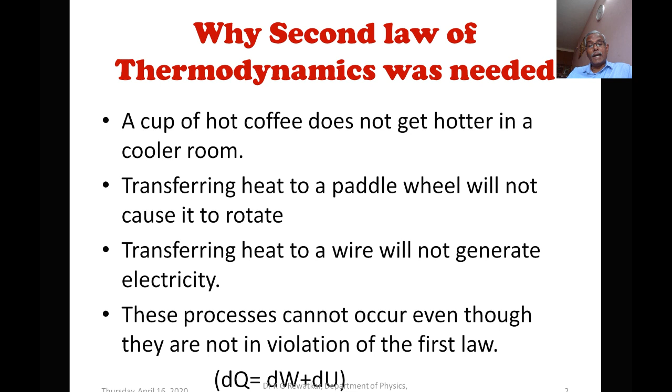The third example: transferring heat to a wire will not generate electricity. So these processes cannot occur even though they are not in violation of the first law. As per the first law, whatever energy is supplied to the system will be utilized in doing work, and the remaining or excess energy will be stored as internal energy.

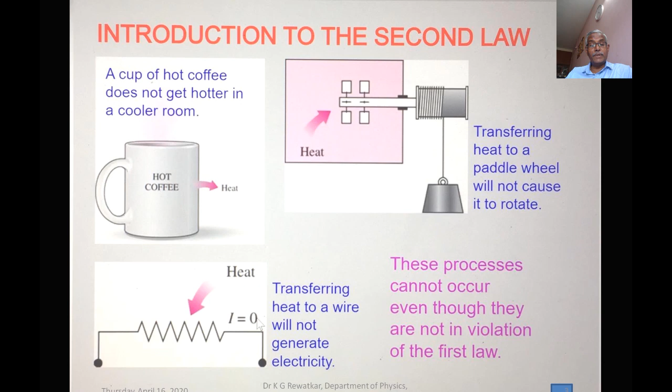But it is not complete, because it does not give a direction. So there is a necessity to think over this, and therefore the second law of thermodynamics comes in. The major use of the second law is that it may be used to identify the direction of the process. This is very important.

The second law also asserts that energy has quality as well as quantity. The first law is concerned with the quantity of energy and the transformation of energy from one form to another with no regard to its quality. So the second law provides the necessary means to determine the quality as well as the degree of degradation of energy during the process.

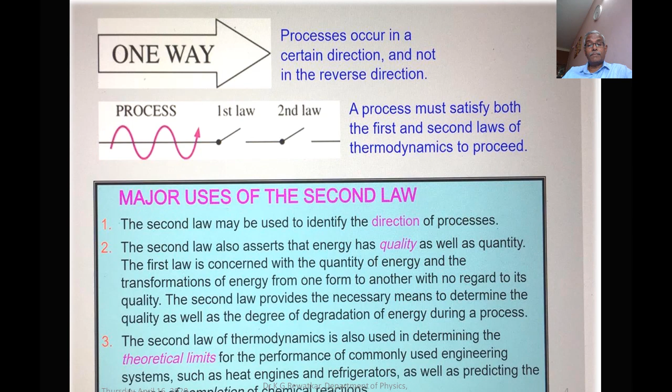Thus we can say that the second law of thermodynamics is also used in determining the theoretical limits to the performance of commonly used engineering systems such as heat engines, refrigerators, etc., and of chemical reactions.

Let me explain the concept of the thermal energy reservoir. Bodies with relatively large thermal masses can be modeled as thermal energy reservoirs. In nature we can see the atmosphere, rivers, lakes, oceans. These we can consider as sources of thermal energy through which energy can be given back to the earth.

A hypothetical body with a relatively large thermal energy capacity that can supply or absorb finite amounts of heat without undergoing any change in temperature is called a thermal reservoir. In practice, such large bodies like oceans, lakes, rivers, as well as atmospheric air can be modeled accurately as thermal energy reservoirs.

Now let us consider an example of a steam power plant. In a steam power plant, heat is supplied to the steam in a boiler from a high temperature source like a furnace, and a pump is required to supply water to the boiler. Similarly, heat is rejected from the steam in a condenser to a low temperature sink, such as the atmosphere or a river.

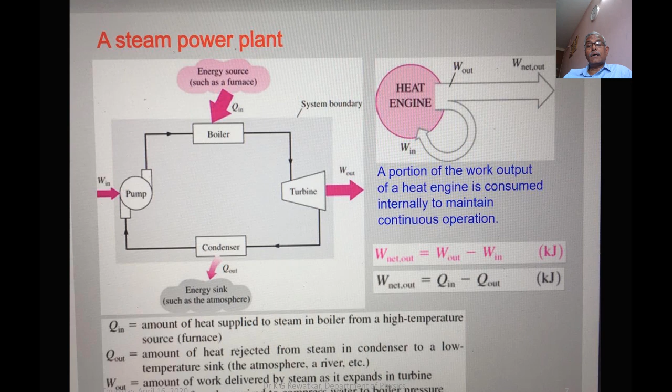Now W out means the output work that will be obtained by supplying the steam to the turbine, and W in means the amount of heat in the form of steam supplied. So this shows that a portion of the work output of a heat engine is consumed internally to maintain continuous operation. So from this we can calculate the efficiency of any heat engine. So here from the

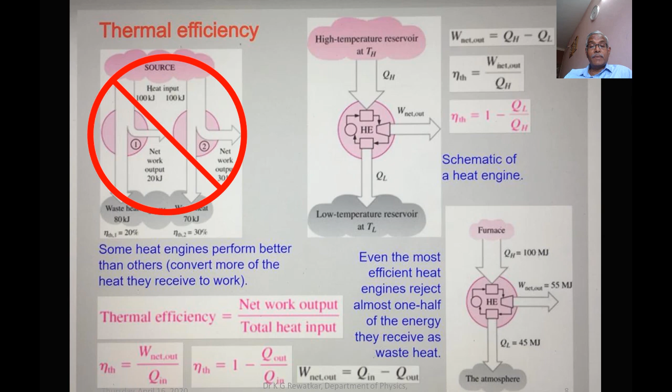So we have understood from this that the second law of thermodynamics not only gives the amount of heat that will be utilized or taken out from the body, but also gives the direction in which it goes. Therefore, two statements are very famous for the second law of thermodynamics. The number one statement is the Clausius statement.

What does it say? That it is impossible to construct a device that operates in a cycle and produces no effect other than the transfer of heat from a lower temperature body to a higher temperature body. Or in other words, a refrigerator cannot operate unless its compressor is driven by an external power source such as an electric motor.

What does it mean? That we cannot develop a machine which can take heat from the colder space or colder body and deliver the heat to the hotter body. If we want to do this, taking heat from a colder body and delivering it to a hotter body, then we require some external source, external agency, external device, external power to drive that, because this is against the natural law.

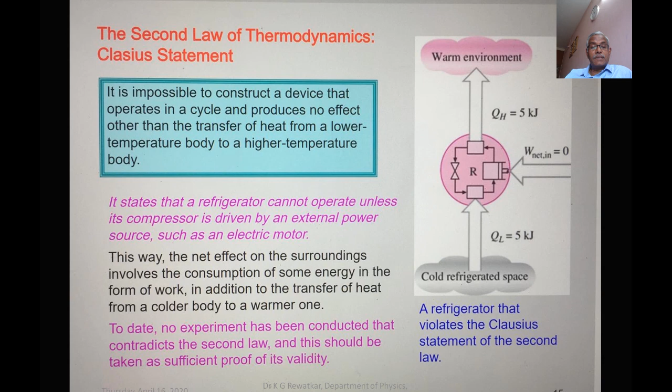To date, no experiment has been conducted that contradicts the second law, and this should be taken as sufficient proof for it. Now let us take an example of refrigerators and heat pumps. In the household refrigerator, that is a domestic refrigerator, the freezer compartment where heat is absorbed by the refrigerant serves as the evaporator, and the coil usually behind the refrigerator, where the heat is dissipated to the kitchen air, serves as a condenser.

If we see the basic components of a refrigeration system, then typically we have an evaporator, a condenser, and a compressor on the back side, so that we can compress, and the heat will be generated, so that heat will be taken out with the help of the compressor.

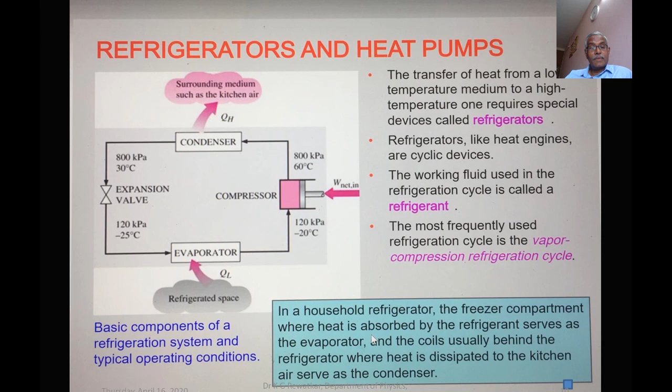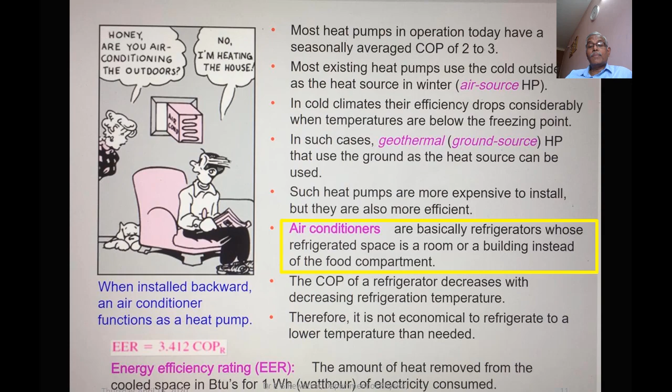So in thermodynamics, there are two kinds of process which are very important to understand the principles and working of the various laws of thermodynamics. The number one process is a reversible process, and number two process is an irreversible process. Let me explain what a reversible process is.

A process that can be reversed without leaving any trace on the surrounding. That means the path it follows in a forward direction, the same path will be followed in the reverse direction, so that the net heat is the same as that of the initial. So the initial condition is maintained in the reversible process.

An irreversible process is not reversible. So when the body starts from one position, goes to some other position, then it will come back following some other path. Even in that case, it is losing some of the energy to the surroundings. All the processes occurring in nature are irreversible. Yes, all natural processes are irreversible processes.

Why are we interested in reversible processes? Because they are easy to analyze. They serve as an idealized model to which actual processes can be compared. And some processes are more irreversible than others. We try to approximate reversible processes.

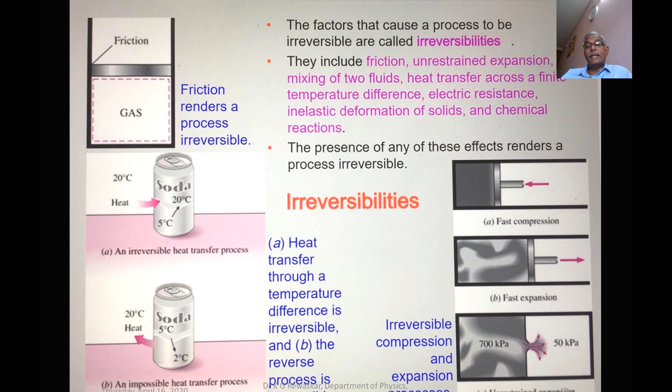Reversible processes are of two types: internally reversible process, if no irreversibilities occur within the boundaries of the system during the process, and externally reversible process, if no irreversibilities occur outside the system boundary. So a totally reversible process involves no irreversibility within the system or its surroundings.

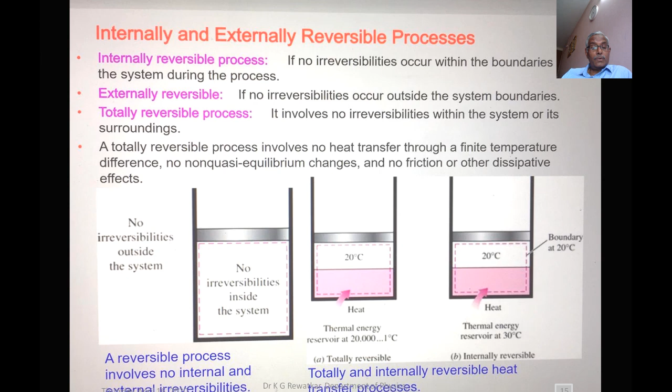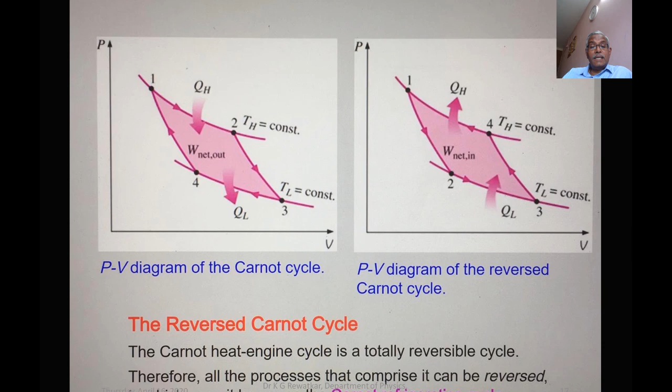So the Carnot heat engine cycle is a totally reversible cycle. Therefore all the processes that comprise it can be reversed, in which case it becomes the Carnot refrigeration cycle. Now we can explain the Carnot principle, the Carnot first principle.

What does it say? Suppose we have two engines, one irreversible and one reversible. The irreversible engine will be taking heat. Irreversible means it is against the reversible process, a process in which there is some loss from the system to the surroundings.

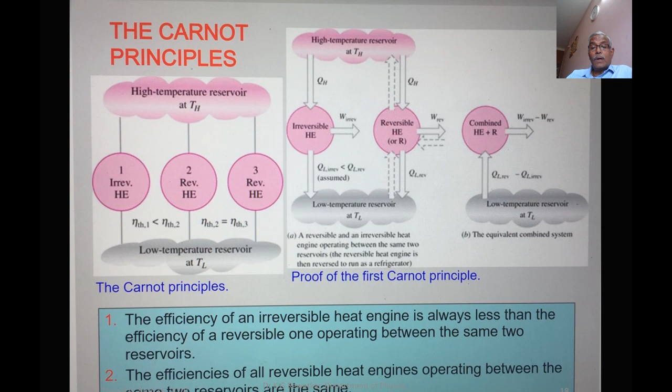Then in that case, if you see the efficiency, the efficiency of a reversible engine will be more. So this also says that the efficiency of an irreversible heat engine is always less than the efficiency of a reversible one operating between the same two reservoirs. The efficiency of all reversible heat engines operating between the same two reservoirs are the same.

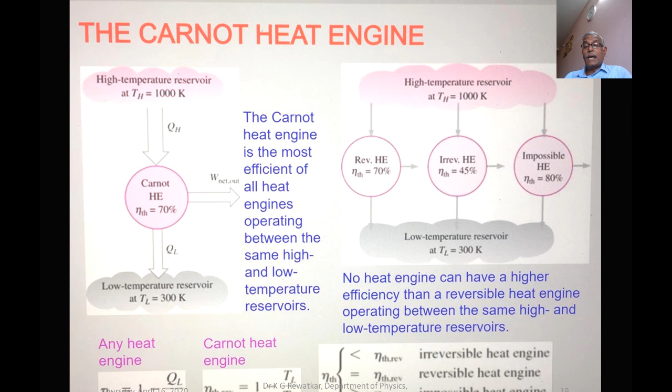So therefore, if you calculate it by putting in the formula, eta is equal to 1 minus QL upon QH, we can find out the efficiency. Then for this, TH high temperature is 1000 and low temperature is 300 Kelvin, and we calculate the efficiency. So therefore it proves that no heat engine can have a higher efficiency than a reversible heat engine operating between the same high and low temperature reservoirs.

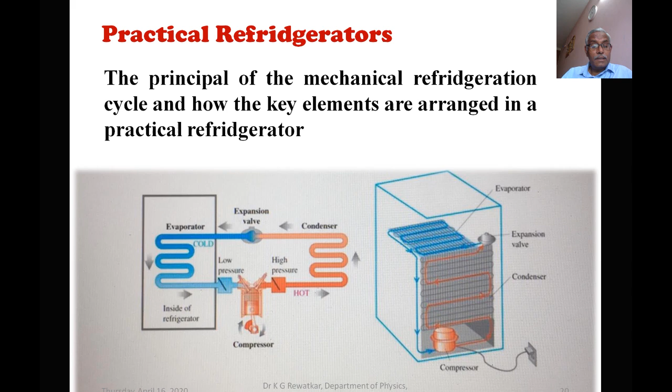So here we can see a practical example of a refrigerator, a domestic refrigerator or any kind of refrigerator. If you see in the second diagram, there is a coil on the back side of the refrigerator. What is this? This is a condenser, and there is a compartment which is called a compressor. So what does the compressor do? If you see the first diagram, it will absorb the heat from inside the fridge, it will be expanded and compressed, and then the heat or energy will be given back to the surroundings.

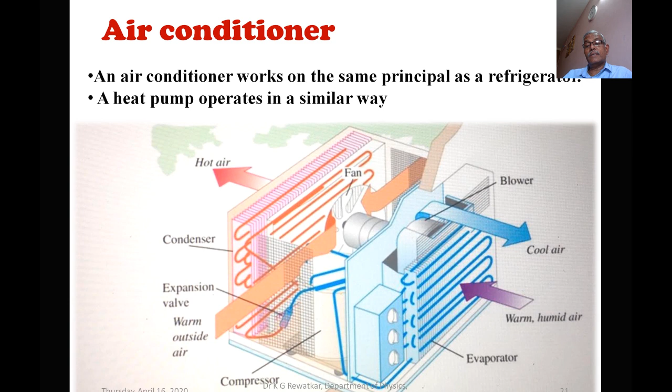The same example we can explain with the help of the air conditioner. An air conditioner works on the same principle as a refrigerator. The heat pump operates in a similar way. The right hand side of the diagram is inside the room. There are buttons, and outside you can see the hot air that will be given out to the surroundings. So there is a condenser, and then the expansion valve, and warm heat will be given out, so that the room will be cooled down. The warm and humid air will be absorbed by the air conditioner, and it will be compressed. Then the cool air will be supplied.

Now the third concept we can see is about the thermodynamic temperature scale, how the temperature scale can be maintained. A temperature scale is independent of the properties of a substance that are used to measure temperature. Second Carnot principle: all reversible engines have the same thermal efficiency when operating between the same two reservoirs, that means high temperature and low temperature. If we have a high temperature source and low temperature sink, and we place reversible engines in between, then they have the same efficiency.

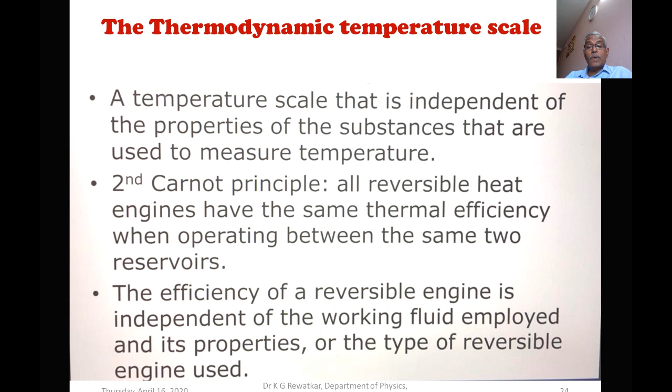The efficiency of a reversible engine is independent of the working fluid employed and its properties or the type of reversible engine. So the temperature scale is independent of the properties of the substance used to measure the temperature. Let us take the efficiency; it is a function of temperature, high temperature and low temperature. Since efficiency is calculated by the formula 1 minus QL upon QH, QH upon QL is a function of temperature.

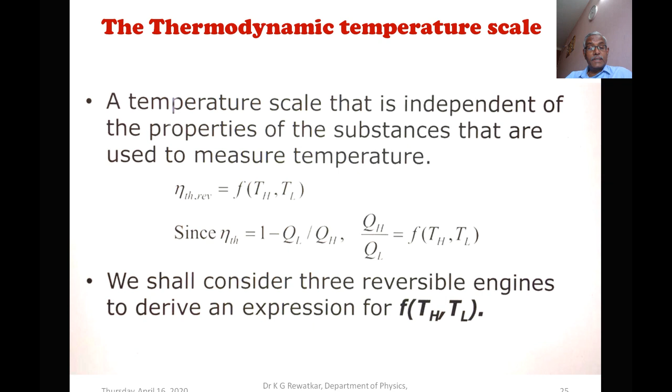So we shall consider three reversible engines to derive an expression for the function of temperature. Here we have a high temperature source which is maintained at a temperature T1, and a low temperature sink which is maintained at a temperature T3. In between we have applied the three reversible engines, heat engine A, heat engine B.

Now A will be taking heat Q1 and rejecting heat Q2 to the second engine B, and the second engine is taking heat Q2 from engine A and rejecting Q3 heat to the low temperature sink. In between, Q2 will be maintained at a temperature T2, and there is a third engine, engine C, which is operating between the temperature T1 and rejecting the heat Q3. So net work done by heat engine A will be equal to WA, B will be equal to WB, and C will be equal to WC.

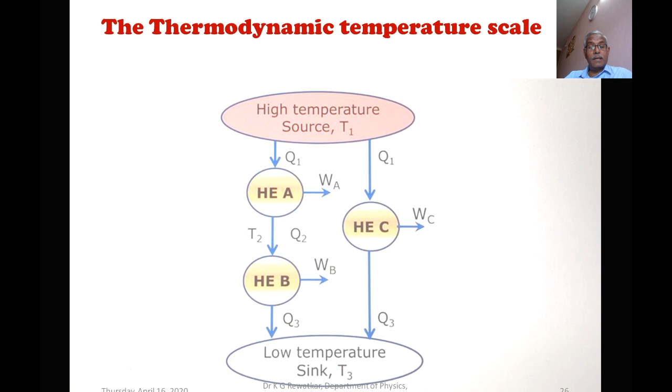So therefore we can say that from the heat engines A, B and C, Q1 upon Q2 is a function of temperature T1 and T2, because of how heat engine A is maintained. Heat engine B is maintained between Q2 and Q3, so it is a function of T2 and T3. And the third engine C is maintained between Q1 and Q3, so it is a function of T1 and T3. Since Q1 upon Q3 is equal to Q1 upon Q2 into Q2 upon Q3, therefore the function of T1 and T3, for heat engine C, will be equal to the function of T1 and T2, for heat engine A, into the function of heat engine B, that is the function of T2 and T3.

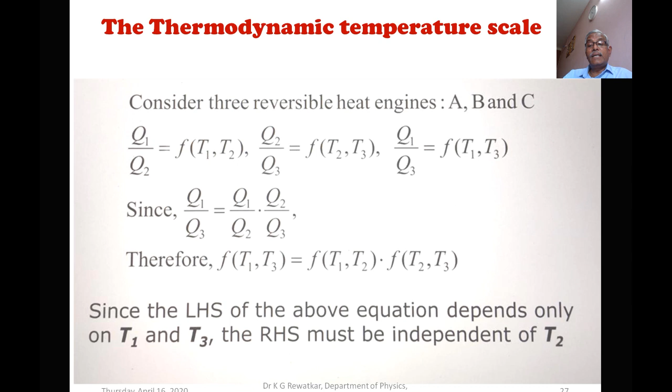Since the left hand side of the above equation depends only on temperatures T1 and T3, the right hand side must be independent of the temperature T2. So for this to be true, the function of T1 and T2 should be equal to phi T1 upon phi T2, and f of T2, T3 is equal to phi T2 upon phi T3. Hence Q1 upon Q3 is equal to phi T1 upon phi T3. In general, for a reversible engine, QH upon QL is equal to function of TH upon TL.

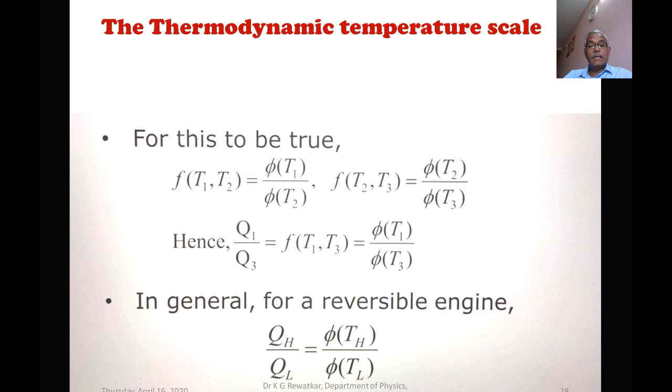So as per Lord Kelvin's proposal, that function of temperature should be equal to T, to define a thermodynamic scale, as QH upon QL for a reversible engine is equal to TH upon TL. This is called the Kelvin scale, and the temperatures on the scale are called absolute temperatures. So for a reversible cycle, the heat transfer ratio can be replaced by the absolute temperature.

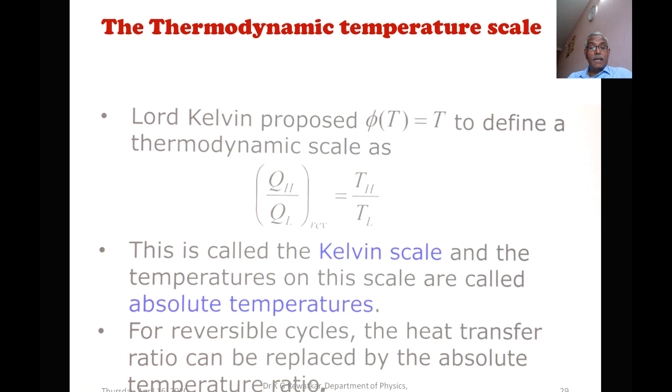So on the Kelvin scale, the triple point of water was assigned a value, as we all know, 273.16 Kelvin. So therefore the magnitude of a Kelvin is defined as 1 upon 273.16 of the interval between absolute zero and the triple point of water. Since reversible engines are not practical, other methods like the constant volume ideal gas thermometer are used for defining the scale.

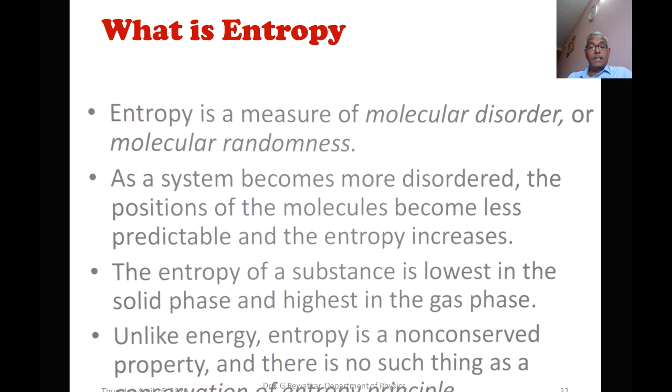Then what is entropy? Entropy is a measure of molecular disorder or molecular randomness. As a system becomes more disordered, the positions of the molecules become less predictable and the entropy increases. So unlike energy, entropy is a non-conserved property and there is no such thing as conservation of entropy. Let me explain entropy with the help of a simple example we come across, the firecracker. Entropy provides a quantitative measure of disorder. The explosion of the firecracker increases its disorder and entropy.

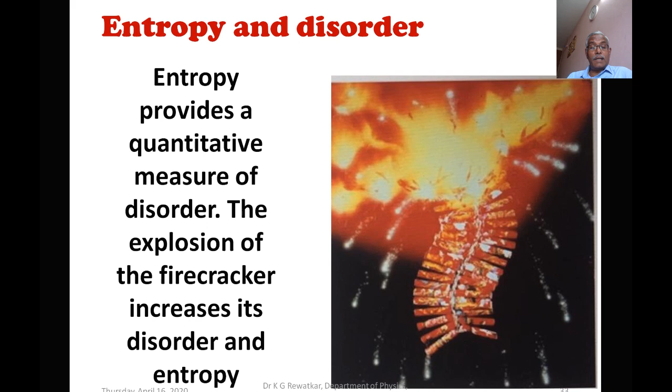So the change in entropy of a system can be calculated as the entropy at the final state minus the entropy of the system at the initial state. That can be written as the equation delta S of the system is equal to S final minus S initial, or S2 minus S1. Now here we can note that entropy is a property, and the value of a property does not change unless the state of the system changes.

Therefore, the entropy change of a system is zero if the state of the system does not change. So entropy, we can say, is a measure of disorder or randomness. So entropy means where there is randomness, or where there is no orderliness. Okay, so that we can call entropy.

So entropy is lowest in solids. Yes, it is lower in solids because the molecules are held in place and simply vibrate, and highest in gases because molecules are free to move from here to there. So where the molecules are free.

So therefore we can have a statement for the third law of thermodynamics: the entropy of a pure crystalline substance at absolute zero temperature, 0 Kelvin, is 0, since the state of each molecule is known. Now what does it mean?

Let me explain. In a crystalline solid, the distance between two molecules or two atoms or two ions, the constituents of the crystal, is fixed. Anywhere you go in the crystal, you can find that the distance is maintained. So therefore no question of randomness arises. So therefore entropy in the case of a pure crystalline system is almost zero at 0 Kelvin. This is what we should know about what exactly entropy means.

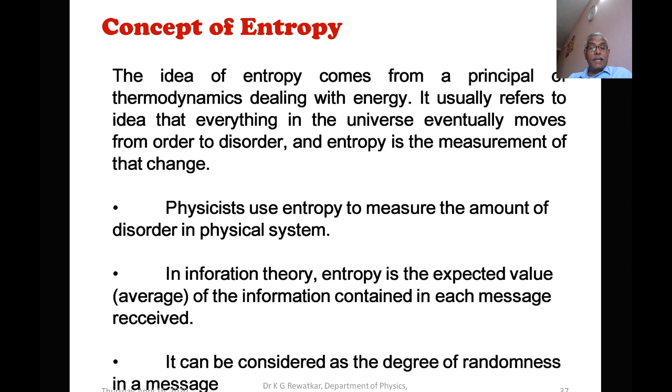So let us see a daily life, real life example of what entropy is. If there is orderliness and if there is disorderliness, where people are randomly situated, naturally we can say that there is more disorder in a playground, while in a classroom the teacher is teaching and the students are sitting there. But in a playground, the other way is true.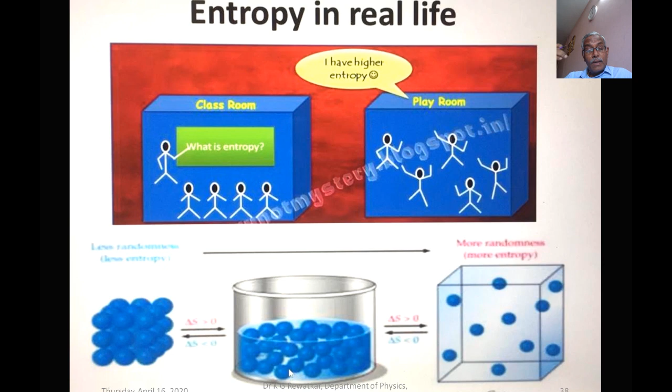Okay. Now you can see in the bottom example a crystal where the atoms are maintained at a regular distance. In a liquid, the distance has increased a little, and in a gas, the distance between two molecules is increased and the molecules are always in a state of motion. So therefore, in a gas, the entropy is more.

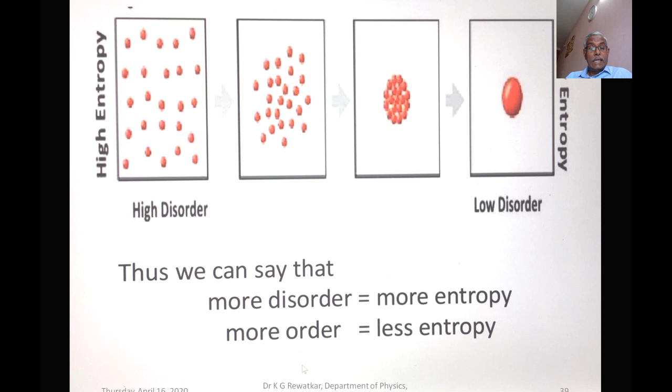The same example we can explain here. In the first figure, the atoms are scattered, so high entropy, and in the last frame you can see the atoms are together, so low disorder. So more disorder, more entropy; less disorder, less entropy.

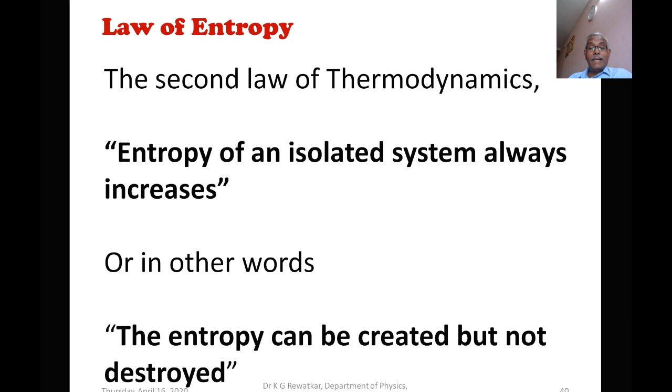From the second law of thermodynamics, we can say that the entropy of an isolated system always increases, or in other words, entropy can be created but not destroyed. The SI unit of entropy is joule per Kelvin, written as J/K. Clausius also gives a relation between units: one Clausius, Cl, is equal to 1 calorie per degree Celsius, equal to 4.1868 joule.

So from the second law of thermodynamics, where the change in heat is written as dq at a temperature T, the change in entropy dS can be written as dq upon T. So that is what entropy is. It is a measure of irregularity in thermodynamics.

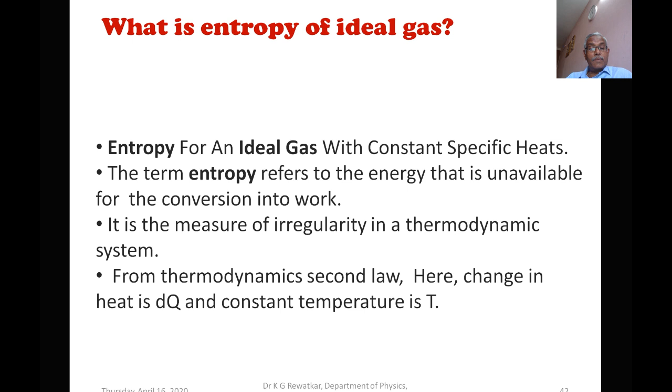So the question arises: is there any effect on entropy if there is a variation in pressure, volume and temperature? Yes. A change in entropy accompanies not only a variation in temperature and pressure. That means the temperature varies.

If temperature increases, the entropy increases. Pressure: again there is a relation between the change in entropy and the pressure or the volume of the system, but also physical transformations such as fusion, vaporization or a transition from one crystalline state to another state. There is always a record of change in the entropy of the system.

So in general we can say that there is a definite change in entropy that is expected if the parameters pressure, volume, temperature are changed. Similarly, physical transformations such as fusion, if we fuse two crystals together, or if we vaporize the crystal, or change from one crystalline state to another crystalline state, there is a definite record in the change in the entropy.

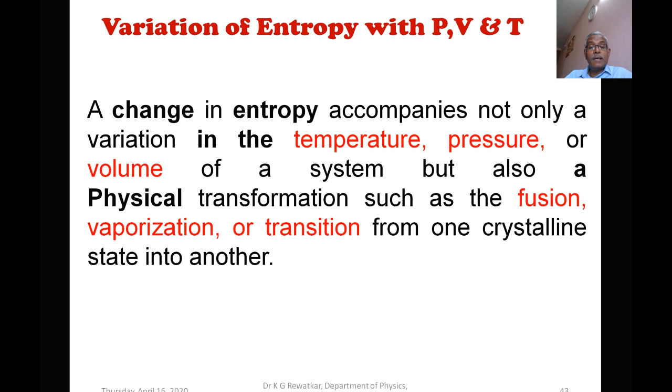So why is it important to know more about entropy in thermodynamics? Because as we all know, thermodynamics deals with energy. So entropy is something like a bookkeeping device which tells us about the flow and the distribution of energy. Entropy can give you an idea about how the energy flows and how the energy will be distributed.

So for any spontaneous process to occur, it is a necessary condition that the entropy of the system undergoing the process should increase. And if the entropy decreases, then that process cannot occur, because we know that the entropy of all natural processes, which are irreversible processes, increases, and if the entropy decreases, then definitely we can say that the process is not spontaneous.

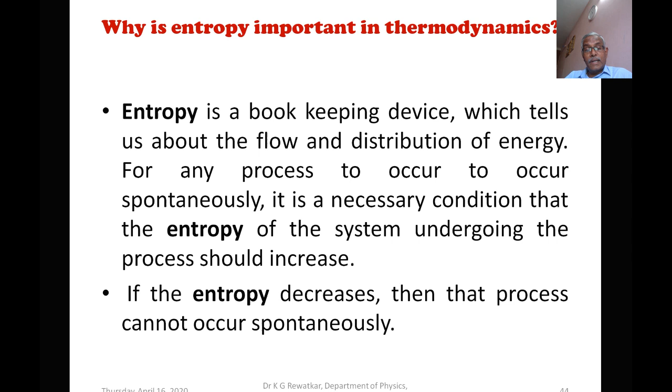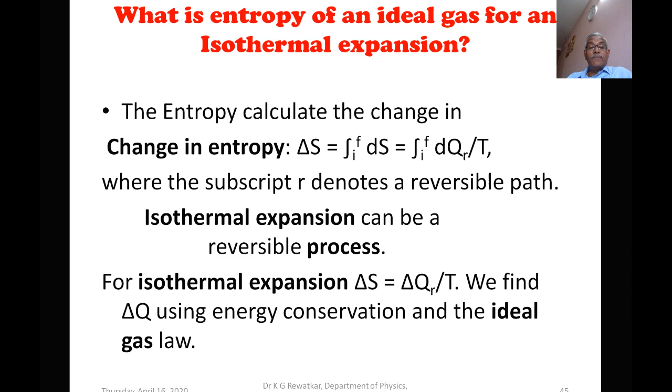So what is the entropy of an ideal gas for an isothermal expansion, an isothermal process in which the temperature is maintained? The entropy is calculated by the simple formula delta S equals the integration from the initial to the final state of dS, and dS can be written as dq_r upon T, where the subscript r denotes a reversible path. So isothermal expansion can be a reversible process. For the isothermal expansion, delta S is equal to delta q_r upon temperature T. We find dq using energy conservation and the ideal gas law.

So let me explain the physical significance of entropy. Entropy is a measure of disorder of the system. We all know about spontaneous processes, which are known to be irreversible processes because they take place at a very fast rate. All natural processes are spontaneous processes, and all these processes are accompanied by an increase in disorder, or in other words, entropy.

We can see this with a simple example: if we heat a metallic rod from one end, initially all the molecules are present in some order, because in metals the molecules are in order, but when heat transfer takes place from the hot end to the cold end, disorder of the molecules takes place. This is due to the attainment of equilibrium, which makes a uniform distribution of energy in the system. Hence, the order of the molecules gets disturbed and gives rise to greater disorder.

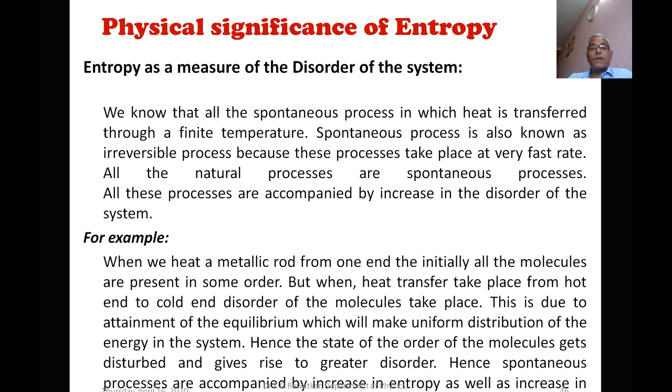Hence, spontaneous processes are accompanied by an increase in entropy as well as an increase in disorder. Entropy is classified into four categories: thermodynamical entropy, statistical entropy, entropy of a classical world, and entropy of a...

So finally we discuss the applications related to entropy. We use Shannon's entropy in information theory and information technology. In the quantum realm, Shannon theory provides a general theory of the interconvertibility between different types of communication resources: qubits, c-bits, e-bits, co-bits, and s-bits. Also, entropy is a measure of entanglement. Entropy is a measure of the uncertainty about a quantum system before we make a measurement of it.

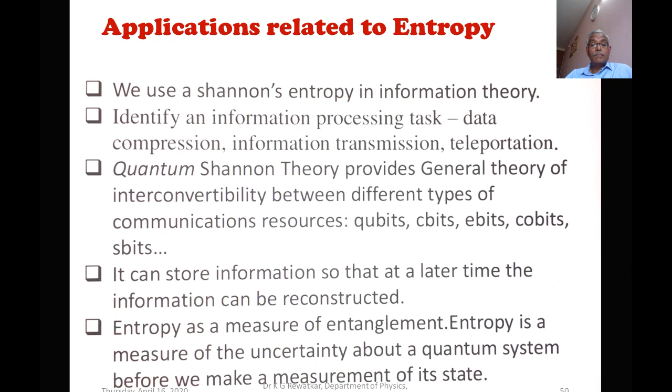This is a very important statement we come across: the second law of thermodynamics implies that the entropy of the universe is increasing continuously, because energy conservation is not 100%. In the ideal case it is possible, but in a natural process it is impossible to keep the energy conservation law strictly. So some heat is always released, and that released heat goes to the surroundings.

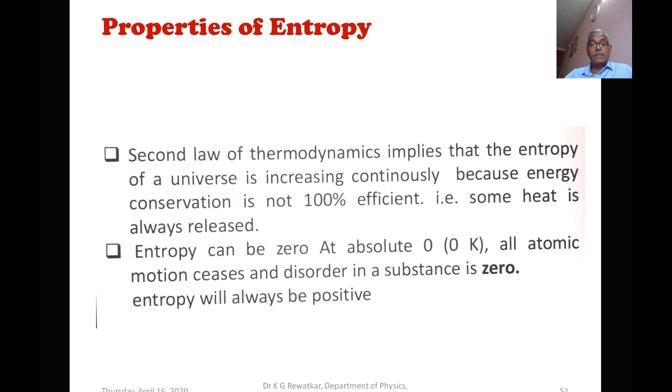So entropy can be zero at absolute zero. All atomic motion ceases and the disorder of the substance is zero. So entropy is always...